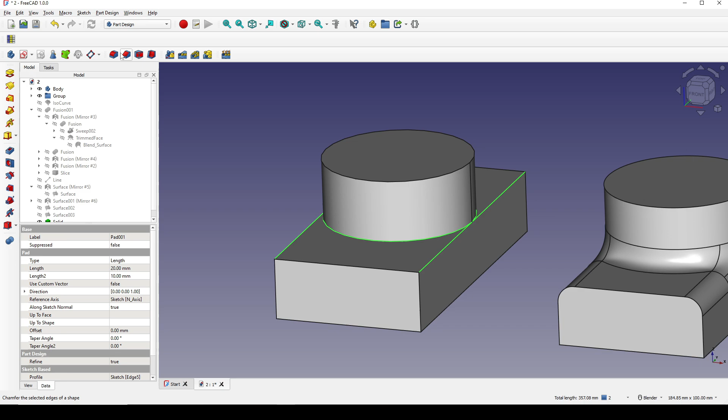Hello guys, on the left is the model that I created in Part Design, and if I try to fillet these edges, let's try to fillet this one. It's working,

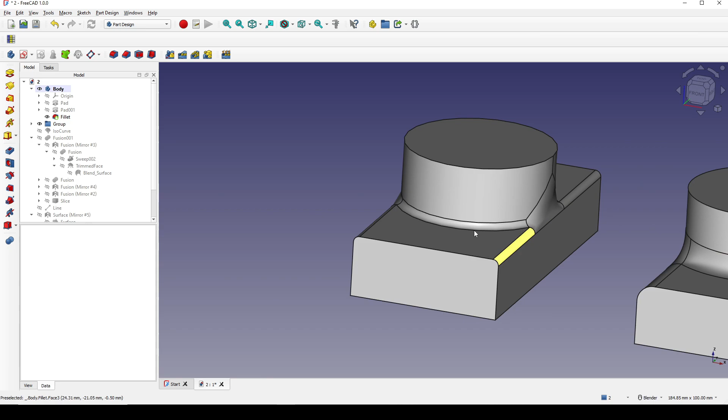but the result is not what I want. First, it's not symmetric, and second, the geometry of the fillet is very bad. I double click on this one, and if I use 3, it's also working. And if I go to 5, it failed.

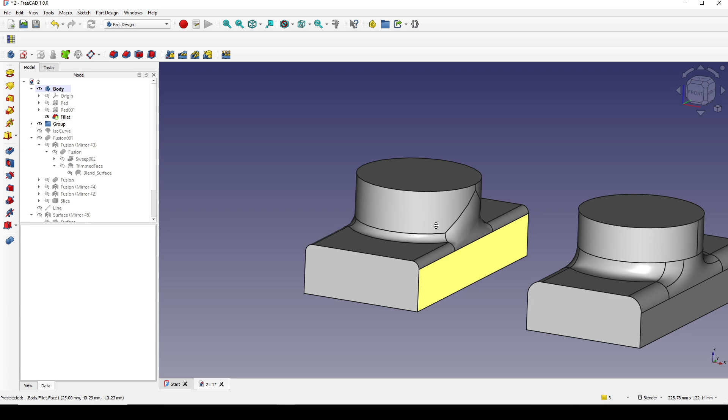So on the right is the manual fillet with radius 6 using surface. In this tutorial, I will show you how to do this. You can create it in Part or Part Design Workbench, it's the same. In this tutorial, I will show you in Part Design.

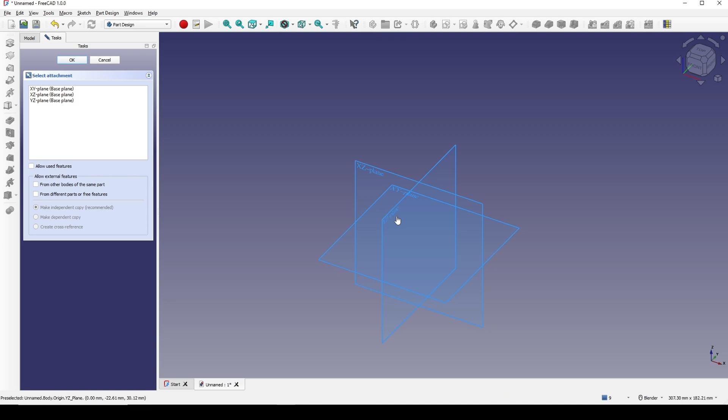I click on Part Design, go to the task, creating a new body and a new sketch in the X and Y plane. I create a center rectangle starting from the center, set the distance of this line, and the length of this line to 100.

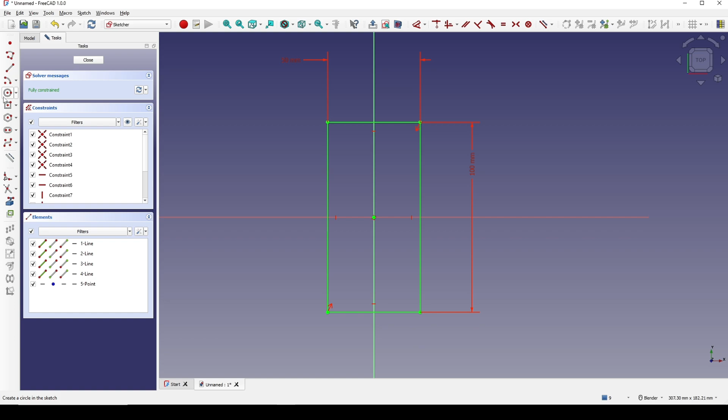Now I create a circle right in the center. I select the circle and this line, and hit T for tangent. Now I close the sketch.

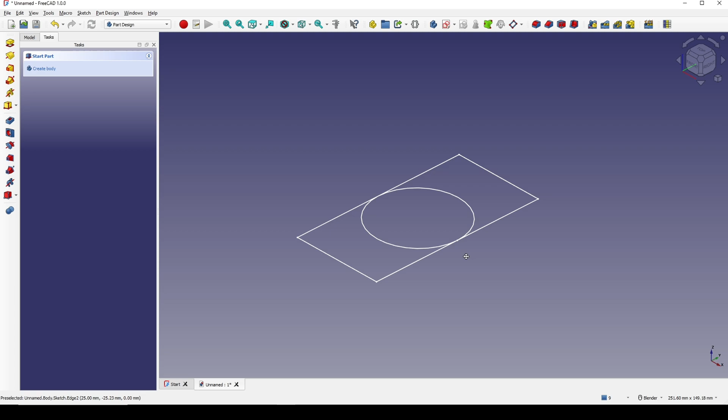Now I want to extrude the base going down, so I control-select these 4 edges and go to pad. I click on the pad, and click reverse to pad this one down. So we try 20.

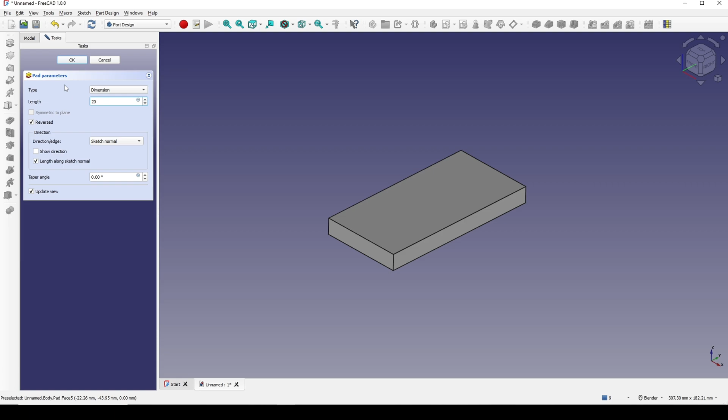I drop this one down and show the sketch. I select the circle and go to pad, also 20.

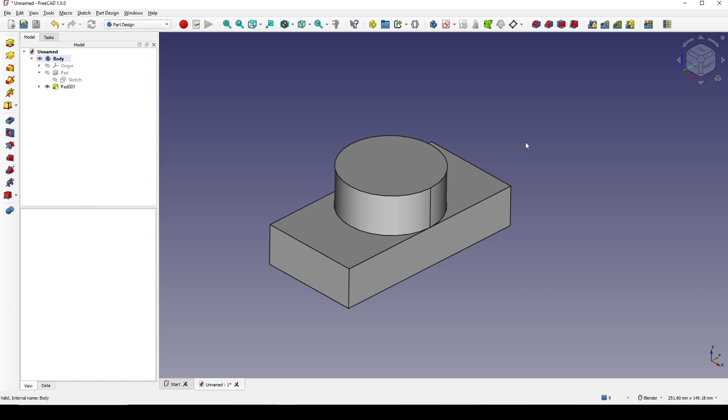All right, so now I am in the Part Design Workbench. To create a manual fillet, I first create a clone and then downgrade this one to multiple faces.

I go to the Draft Workbench and turn off the grid. I click on the body and create a new clone. Then I hide the body and collapse this one.

I click on the clone and go to downgrade, or you can use the hotkey D and N. Now we have many faces. I want to work with this face, this face, this face, this face, and this face.

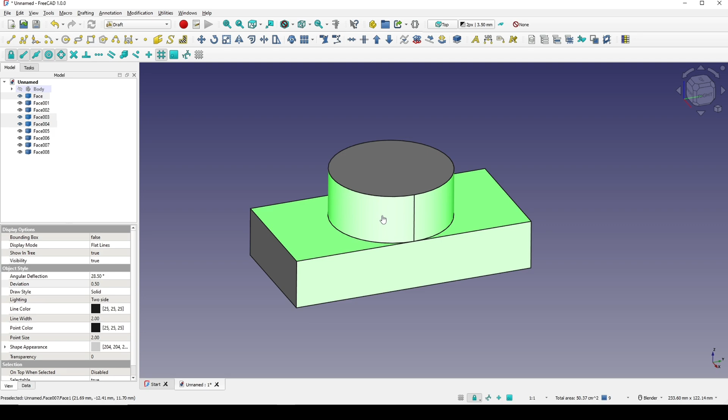So I select all of these faces on top, also this face, and click on upgrade, or the hotkey U and P, creating a new group, and I add everything inside the group. Now I drop the group down and hide these faces on top.

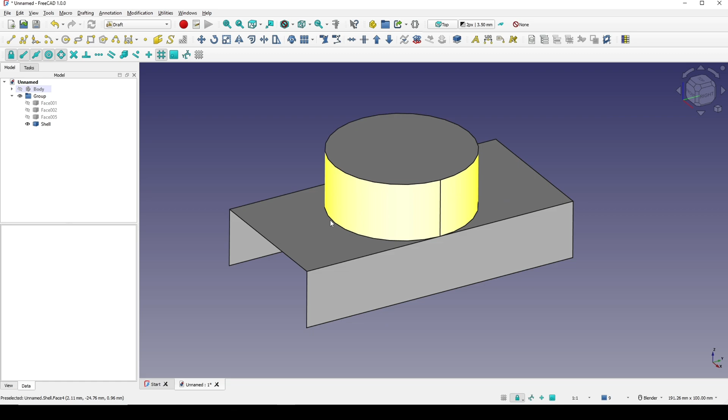Now I want to create a fillet with radius 6. So again, I will create a sweep with a circle here, and sweep along this edge and also this edge, and also the same circle sweeping around this curve over here. And later I will do some cutting.

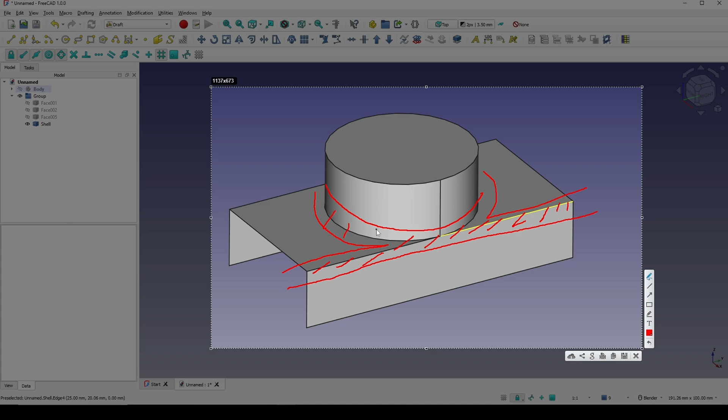So I will have a cut like this, a cut like this, and also something like this. I will remove all of these faces in the middle, and I will use a plane curve and slowly fill the gap in between.

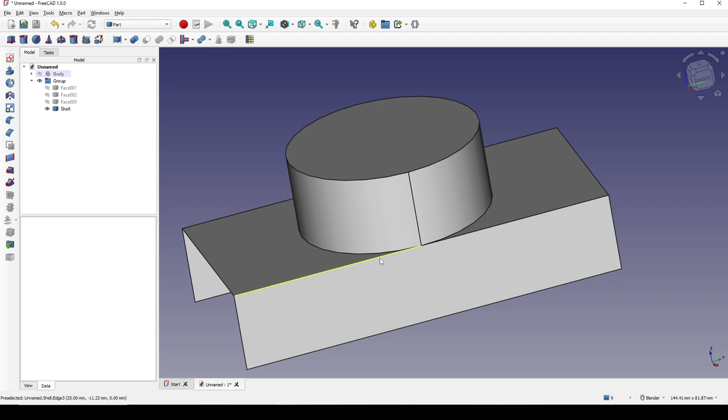I go to the Part Workbench and control-select this edge and then this point, and create a new sketch choosing normal to edge, and click OK.

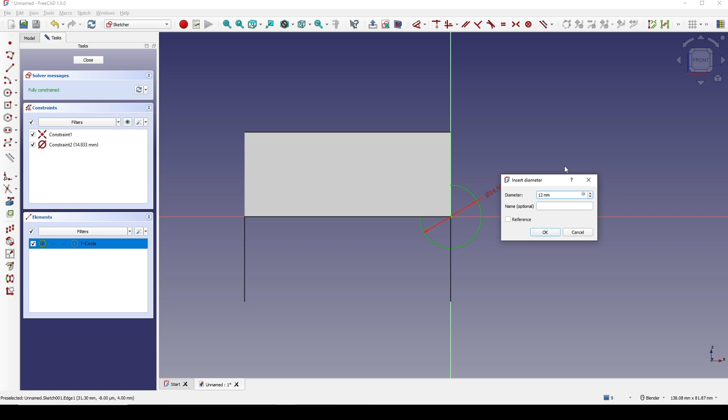I create a circle with diameter 12. I click close.

I go to the sweep, click on sweep, and double click on this sketch. I click on sweep along a path and control-select these two lines, then hit done to create solid.

So for some simple sweeps, you can check or uncheck the Frenet frame; the result is the same. I click OK. Now I have a cylinder.

I select the sweep and go to mirror. I want to mirror it in the YZ plane. I click OK, now I have another one. I drop the sweep down, select these two, and hide them.

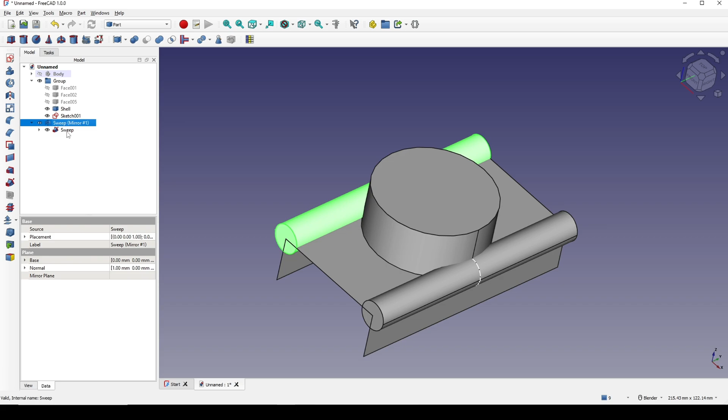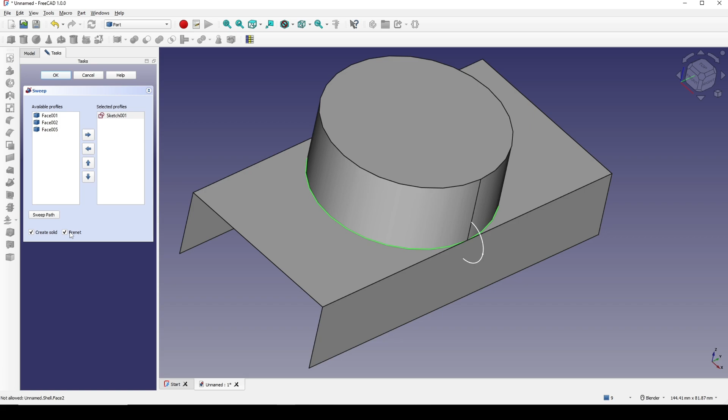Now I go to sweep again, double click on sketch 001, click on sweep along a path, control-select these two lines, and hit done to create solid. Also check or uncheck the same option. I click OK. Now I control-select this one and then this one and go to cut.

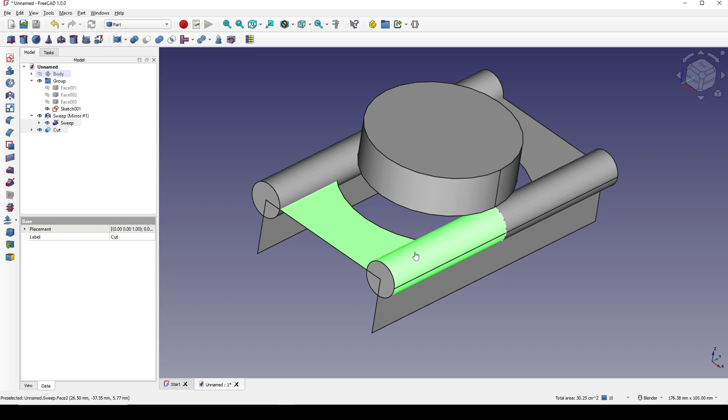Alright, so this is how it looks. And then I will show the mirror and the sweep. Control selecting this one and cut, this one and this one, cut. Okay, and I also hide this circle.

The next step is I want to create a blend curve, connect from this line to this line, and I will sweep along this edge over here to have this surface first.

So I go to the surface workbench, and I control select this edge first and this edge later, and I click on the blend curve. I click on the blend curve in here and I go down to the data.

The first step is I zero out the start size and the end size, turn this one into a straight line, too easy to see what's going on in the scene. And you can see this blend curve over here has the wrong position. I want to bring this one from this point to this point.

So because I selected this edge first, I will go to the start parameter, and instead of 0, I will go to 1, and I increase the start size to 1, and the end size also 1. Okay, now you can see the blend curve working fine.

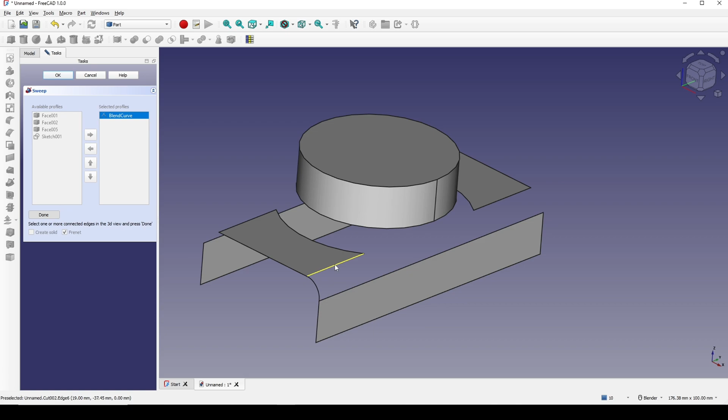Now I go to the part workbench and go to the sweep, and then I double click on the blend curve for the profile, and I click on the sweep path and select this line and hit done and OK.

Okay, the next step is I want to split. I will split this one to have this edge from here to here, and when I have this short edge, I will use the blend surface to blend between this surface to this surface, like this.

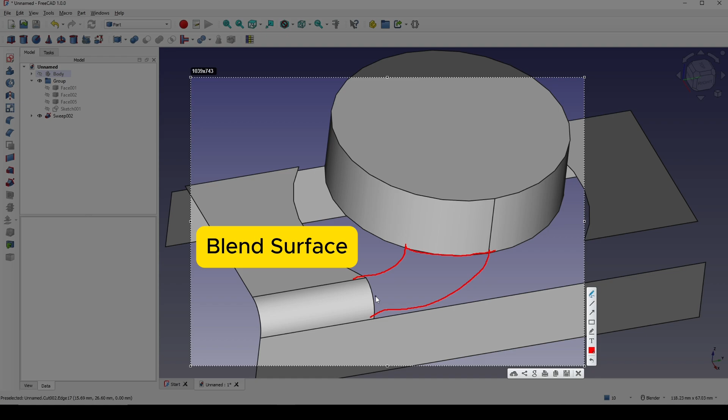And when I have this blend surface, I will use the ISO curve to split this one in half, and the trim face to remove the surface down below.

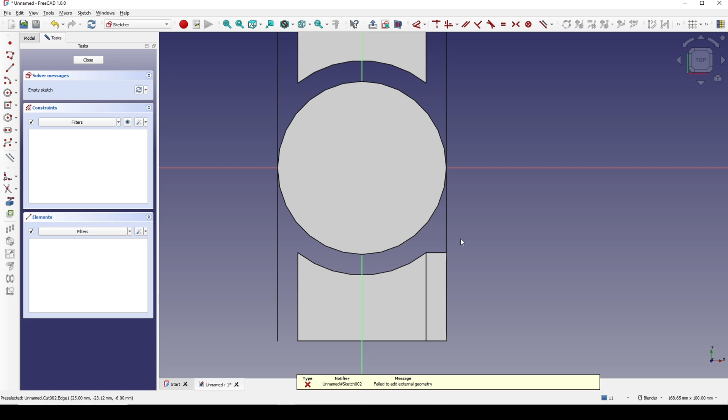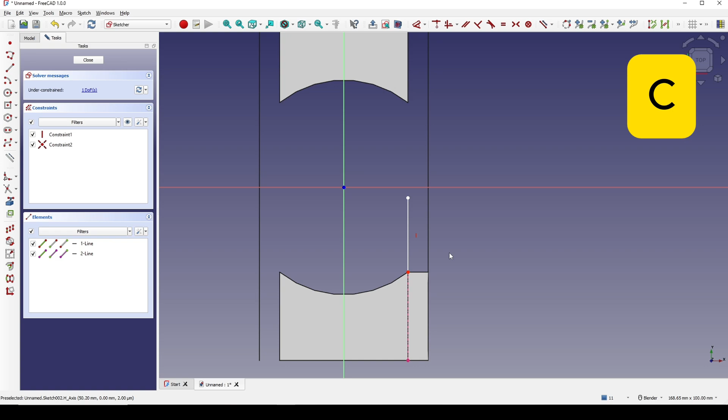I click on this point and this point, and I hit C to snap it together and make this line a little bit longer, and I close. You can see I have this line like this.

Now I select this sketch and I go to extrude. Let's try 10 for that, and I click OK. You can see 10 will go inside the surface.

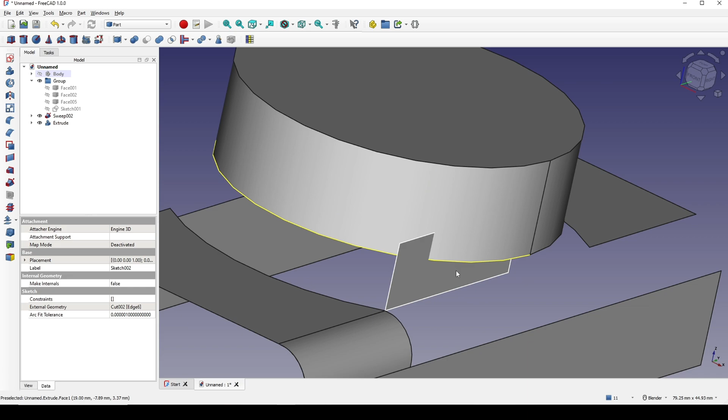So when I split, I will have this line in here, so I don't want that. So I will click on the extrude and I go down to the data, and the length forward, instead of 10, I will put this one to 6.

Because the radius of the fillet is 6, so I know that the distance from here to here, the distance from here to here is 6.

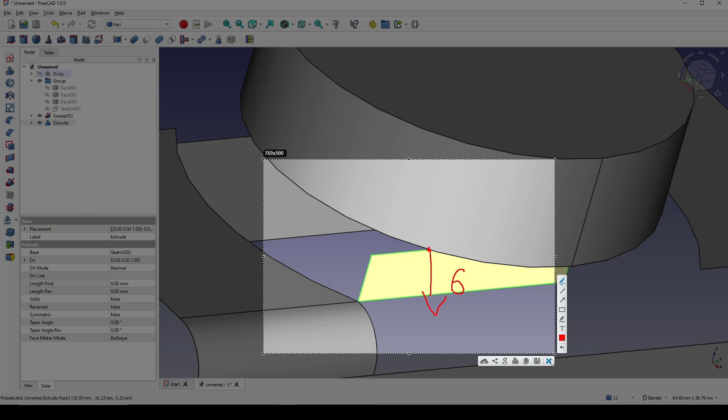Now I control select this one and then this one, and I go to the part, split, and then slice to compound. And if I move my mouse over here, you will see I will have this edge.

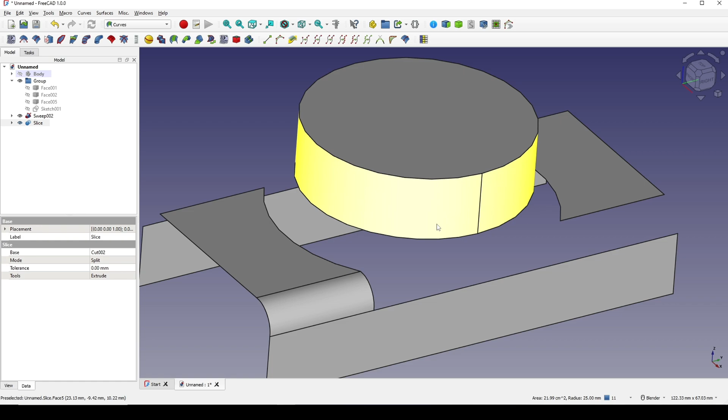And we're ready to use the blend surface in this case. So I will go to the Curves workbench, and I control select this face and then this edge. Make sure you're selecting this edge, and then this face and this edge, and blend surface.

I click on the blend surface, and you can see I have a good G2 continuity blending surface in between in default.

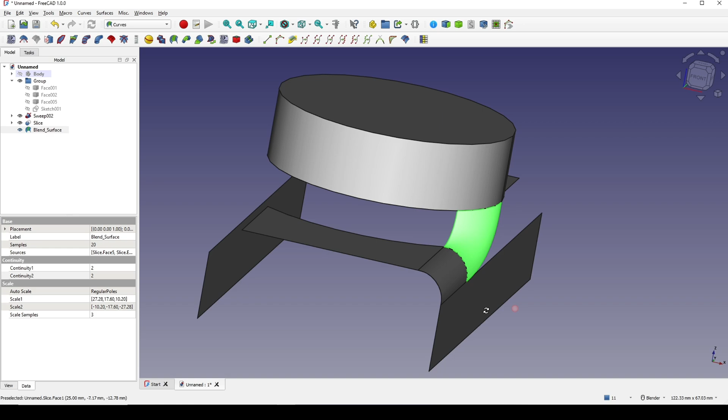So you can click on the blend surface and you can choose between, you can increase this one to G3 if you like, but I think G2 is okay. So I will go with the G2.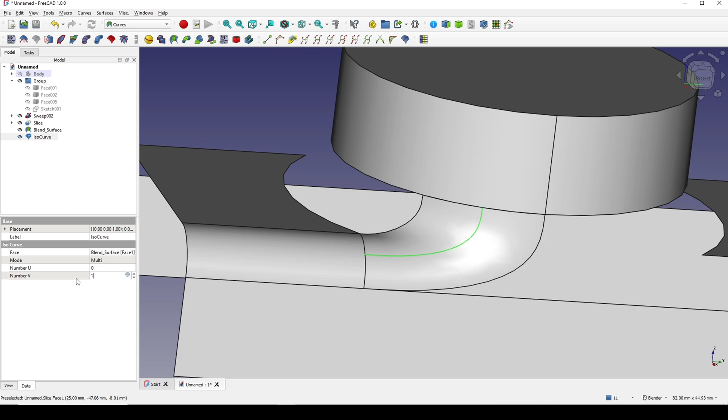And the number of V, I will set this one to 1, and we just get a simple curve in the middle.

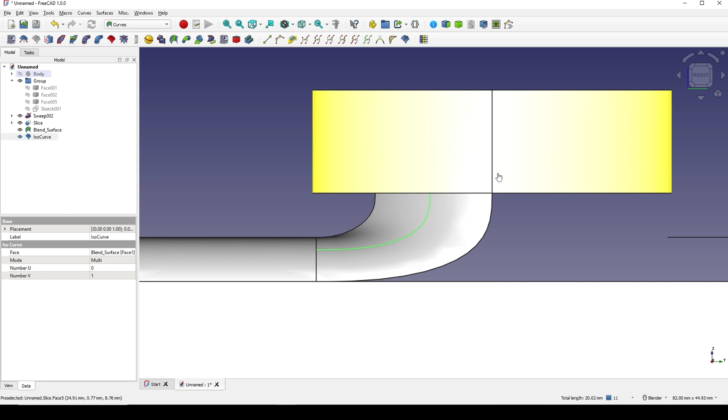Now I will use the trim face to remove the surface below. So I go to the right view. Make sure you are in the right view, okay? You click on the right in the cube up here. You have to be exactly in the right view. Then you can select the curve and the surface you want to keep. So I click on top and I click on the trim face.

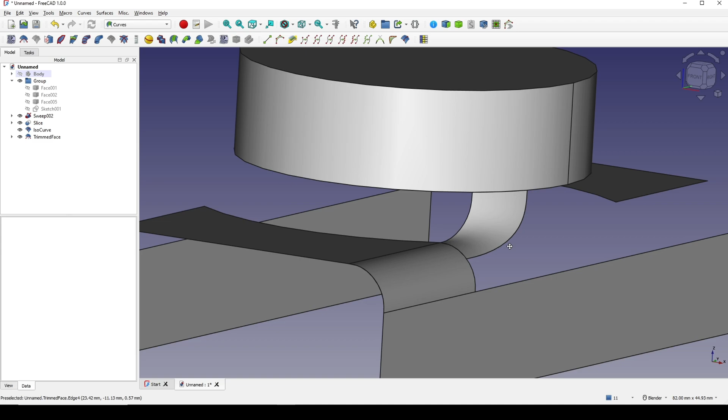And then I have the surface, as you can see. Now you can see in order to fill the surface in between, we need to mirror this face to the other side, and also this face to the other side.

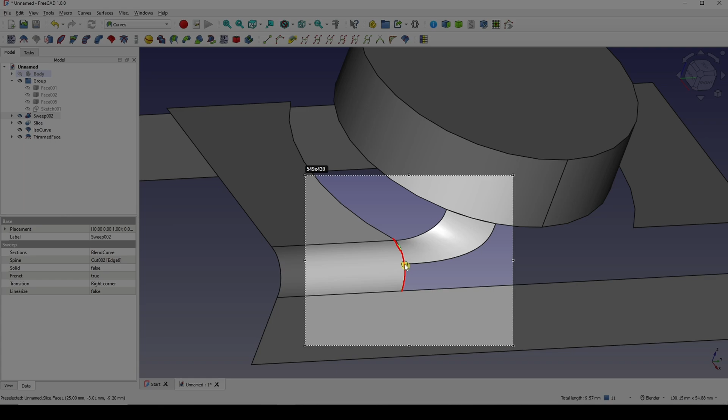But if I move my mouse over here, you can see currently I have a long edge like this, but I just want a short edge from here to here. In order to get the short edge, I can just select these two and go to the Part workbench and click on the fusion and click yes. Now if I move my mouse in here, I have the short edge.

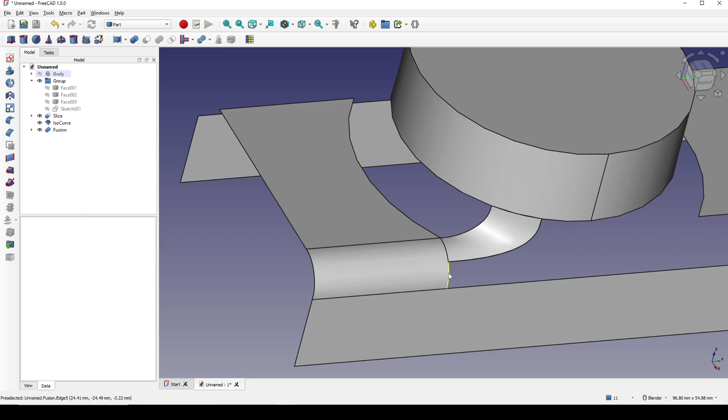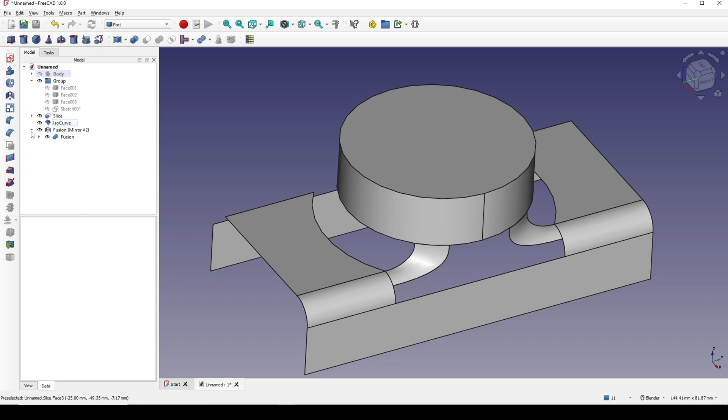Alright, now I click on the fusion and I go to the mirror. I mirror this one in the YZ plane and I click OK. Now I drop this one down and select these two and go to the mirror. Mirror in the YZ plane. Click OK.

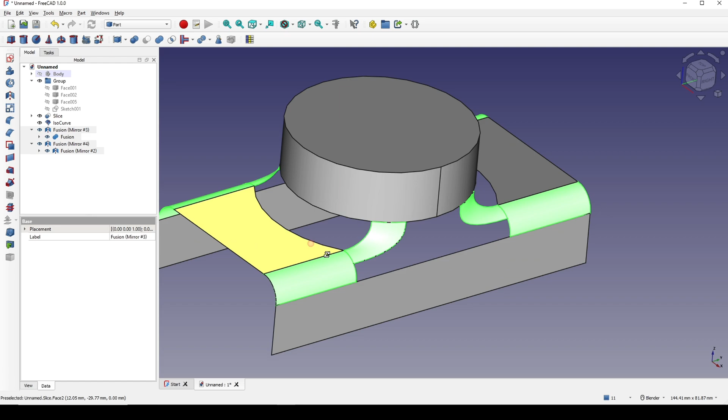Now you can see. Now I drop this one down and drop this one down. I can select these four surfaces, and this one, the slice, and I go to the union and I click OK.

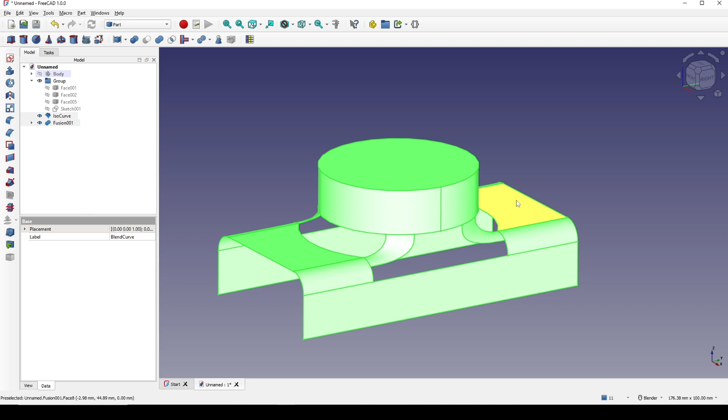Now we're ready to fill the surface in between. I hit Shift B and select everything and hit spacebar to hide everything. I just want to show the fusion 001. Now we're ready to fill the surface in between. I go to the surface workbench and click on the filling tool and start filling.

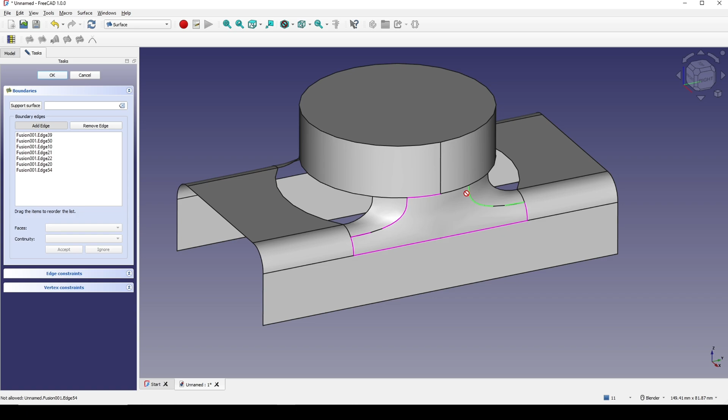Okay, something like this. I double click on each edge and choose the face and G1. Okay, something like this, and I click OK.

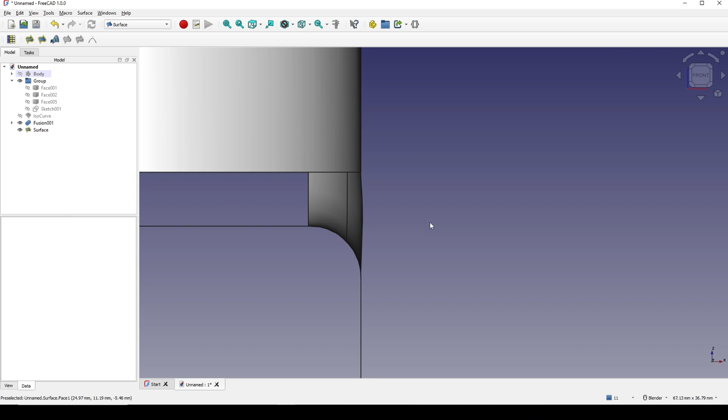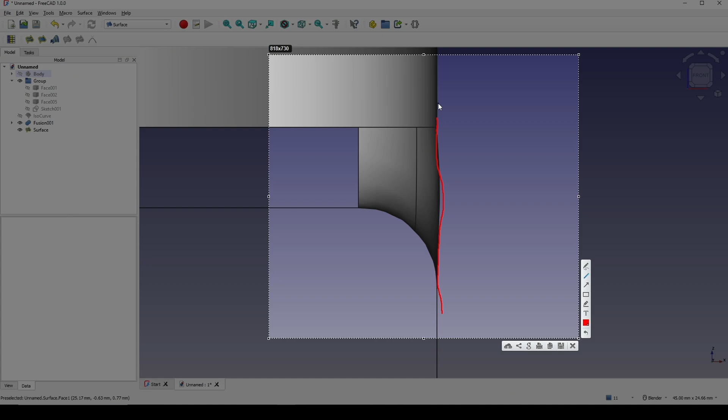Now if I go to the front view, you can see the surface, this is our new surface, but you can see the surface go out a little bit. It is a very smooth transition in here, but it goes up a little bit, and then it goes down, and then it's a smooth transition. I want this one to be perfectly flat from top to bottom.

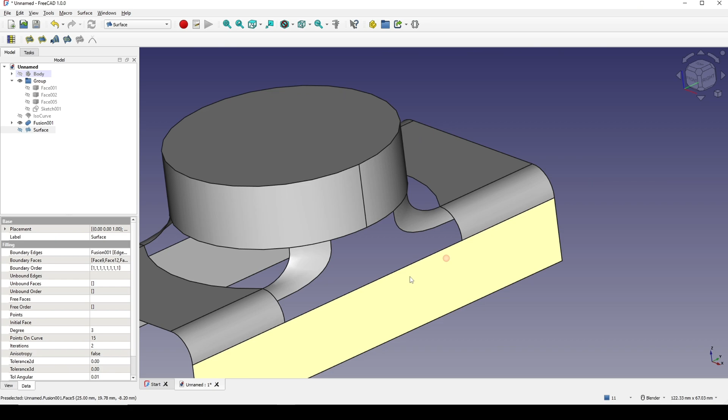So I will need a line in the middle to control the surface. In order to create a line, I will first hide the surface and go to the curves workbench. In the curves workbench, I can select this point and then this point. And I go to creating a new line. And then I will show the surface.

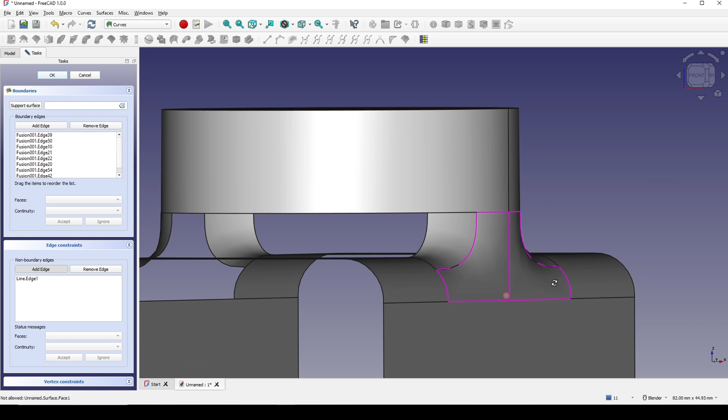I double click on the surface and go to the edge constraints. I click on add edge and click on this edge. Now you can see the surface is now flat in this area. Now I click OK for that.

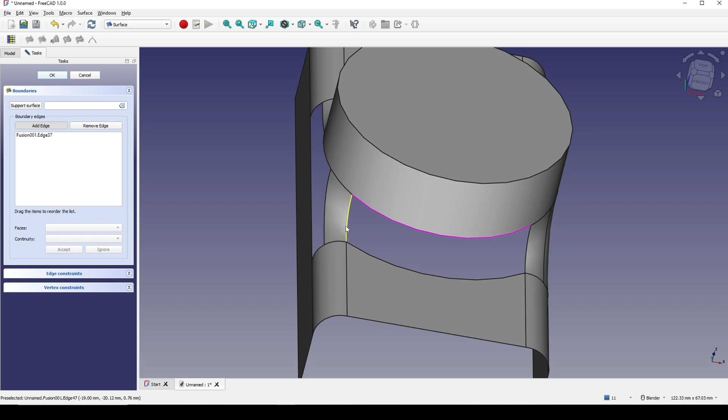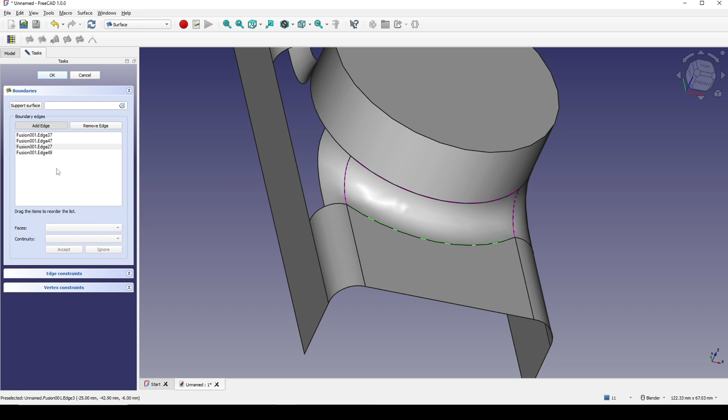Alright, now I go to this side and start to fill this hole. Go to the surface and fill in again. And double click on each edge and choose G1 for that. Okay.

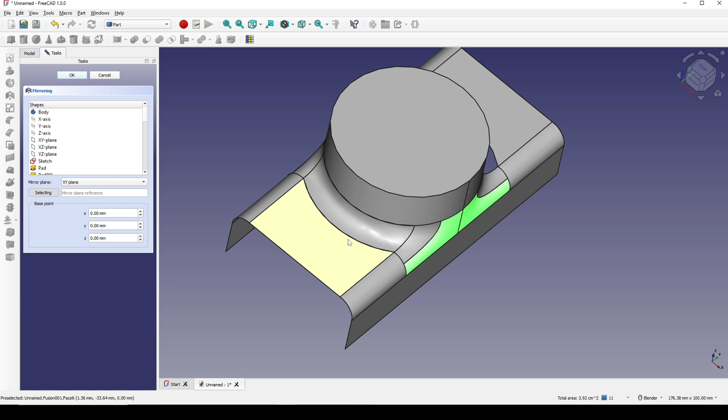Alright, now I will mirror this one to the other side. So I click on the surface and go to the Part workbench and click on mirror. Mirror this one in the YZ plane. Click OK. You can see. Now I click on the surface 001 and go to the mirror in the YZ plane. Okay.

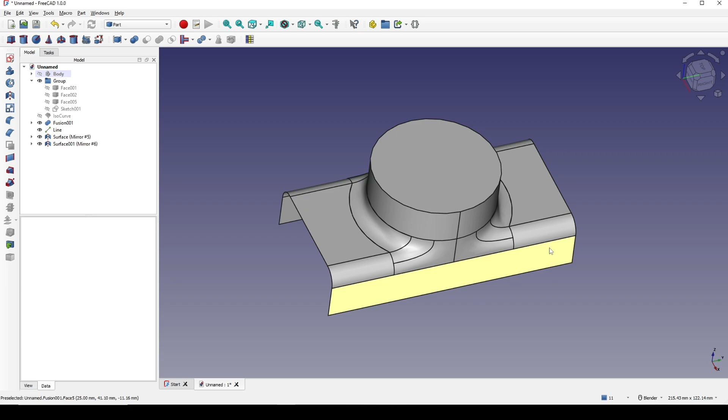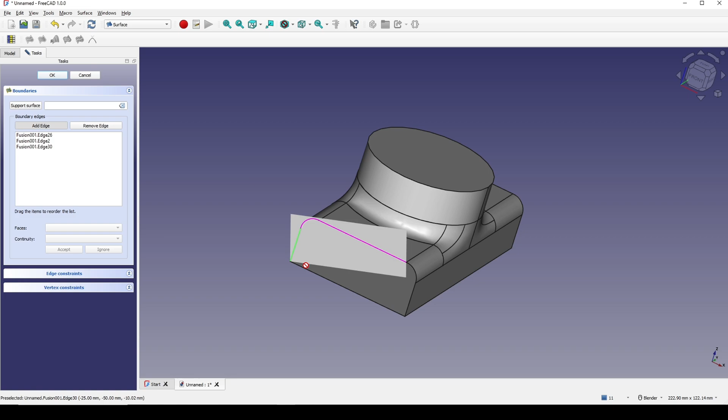Now I will show one of these faces on top. Now I just simply control select this face. You can see this face is not what I want. So I select it and also select this face. And I will delete it. And I will go to the surface and simply fill in this hole. I click OK.

I go to here, fill in. And also fill in this area in here. Click OK.

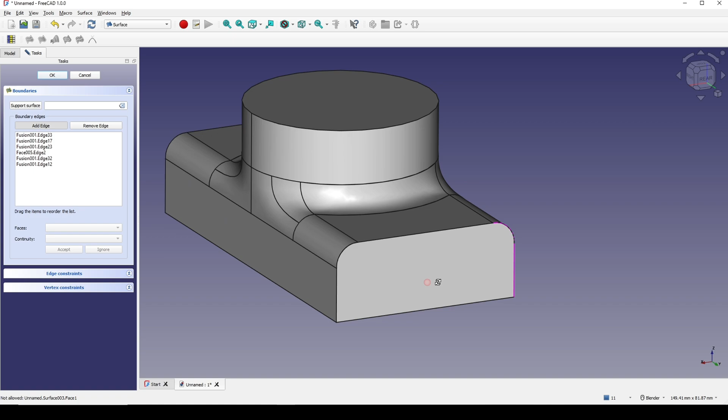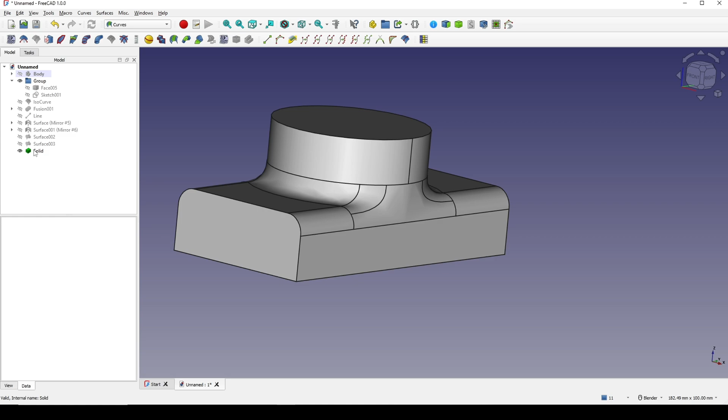Now I hit Shift B and select everything, and I go to the curve workbench and parametric solid. Now I click on the solid and go to the view and deviation down to 0.01, and this is the final result. So thanks for watching and see you in the next video.